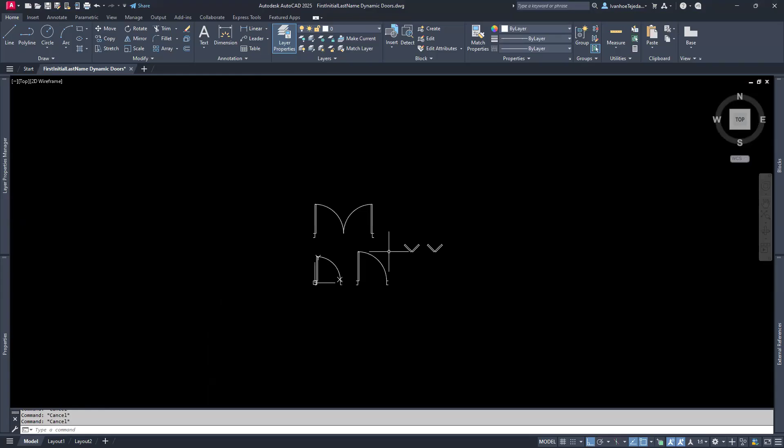First, the question about zooming in and out. I talked about it last week, how you can use the wheel mouse, and the question came up about being on a Mac or if the mouse is too sensitive and just jumps in or out. It can be problematic. So here's my solution to that.

Number one, if you're okay with the trackpad, sometimes you can pinch. I've tried pinching before, and here I am pinching on my trackpad, but it just doesn't feel natural to me. I'm not used to that, but that's an option. Pinch in, pinch out, just like you do with photos, and it may work. You can try that out.

That's number one. Number two, over here on the side of the screen, you're going to see this window. This is the navigation window, I think it's what it's called. I don't think I can move it away either. And be careful, don't close it, because if you do, I have to figure out how to bring it back. But there's this wheel right here.

Let me hover over it again and click on this dropdown for a second. This is the navigation wheel. I always like to have it on full navigation, but you can reduce it. You can go with the mini, as soon as I show you how to do this. So I'm going to leave full navigation wheel on for now.

And then I'm going to click on the navigation wheel like this. When I click on it, you'll see that I have a few options. Now be really, really careful here. If you click on this orbit, it is going to give you some problems. The only thing I would use in this case would be the zoom and the pan.

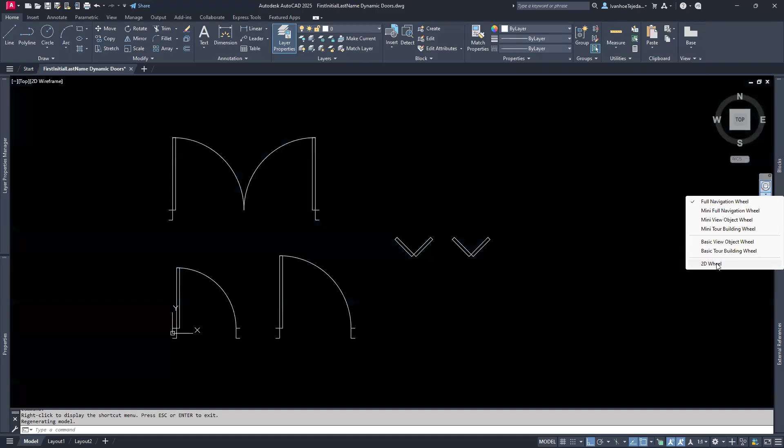Let me take back what I said a moment ago. Don't go with the full one. Can I go with a 2D wheel? Let's see if I change it. I hardly use this. There we go. Okay, so here we go.

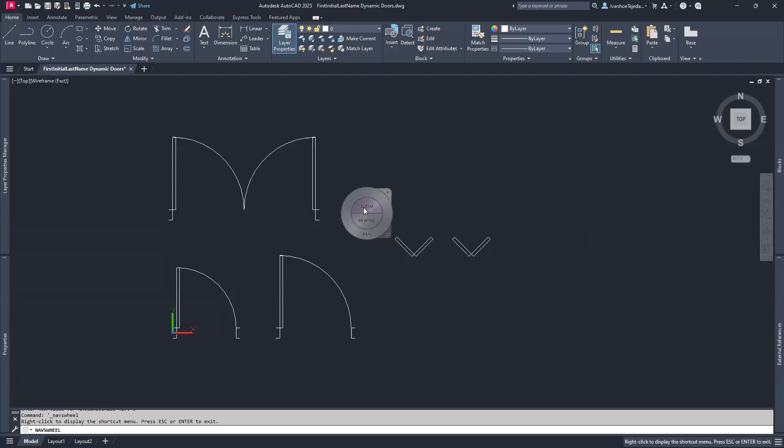The 2D wheel looks like it'll work because I can zoom and I can pan, and there's a rewind here. So all I have to do is move the wheel more or less to the center of my screen, give it a click, but don't take your finger off the mouse. Click and then drag up or drag down, and that will zoom you in and out. Then release the mouse, and you're back to zoom.

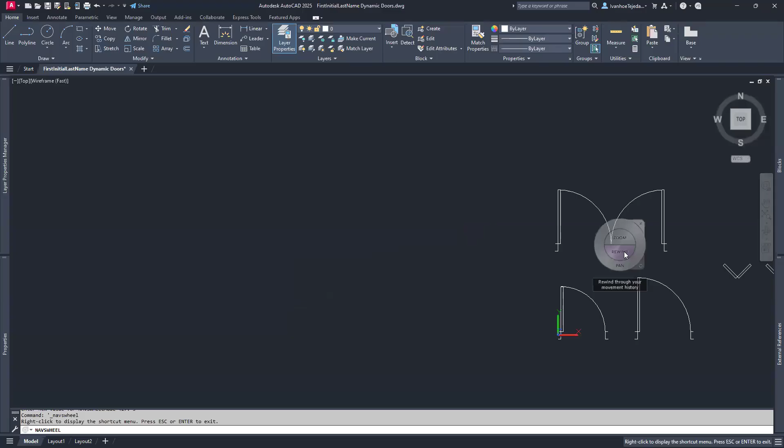If you want, you can click and drag to pan, and you can pan the drawing. Let's say I accidentally pan it too far. I can use this rewind, hold it down, and it will rewind and take me back a couple of steps, as far back as I want to go. So let's say I want to stop here, I release it. So zoom, pan, and rewind.

This will be helpful, so try that. Then I'm going to click on the X up here, and that's going to close the wheel. It's always going to be on the side over here. So yes, make sure you're using the 2D wheel. All right.

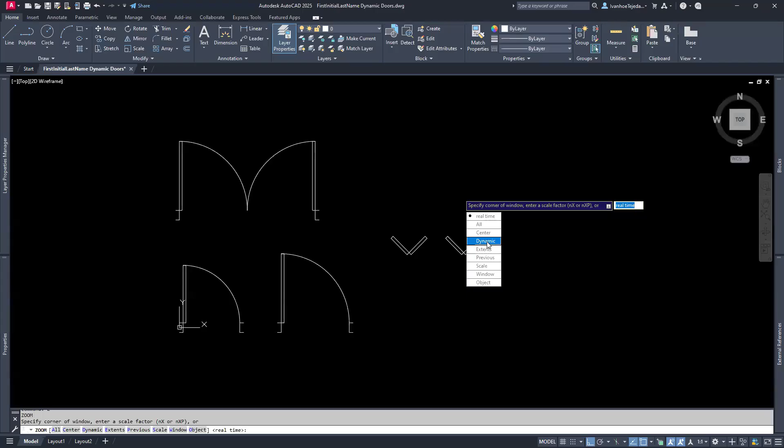Now for the third option, I'm going old school on you, real old school. Before we had a wheel mouse, and yes, I remember those days when it was just left and right click, there's a zoom feature called Zoom Dynamic. Nobody uses it anymore, but boy, we could not live without it years ago. So I'll type Z, enter, and under my options you can see in the command line it says all, center, dynamic, and so on. If I use my down arrow, I can see all the options here too. I want to go with zoom dynamic, so I'll click on it. When I do that, you'll notice my window changed, and now I have a floating window here.

This is really cool because I can click and drag. When I click and drag, I can zoom in a bit like this, and I'm also panning at the same time, so it lets me do that. Then I release the mouse, click, and right click, and it will zoom me in right there. So zoom dynamic works.

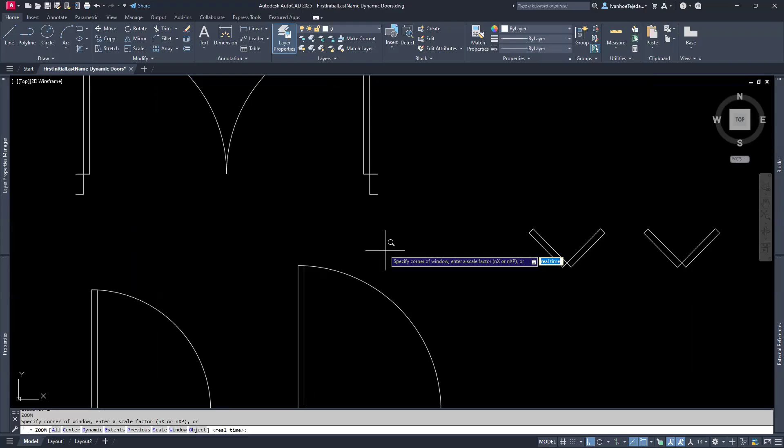Let's see, I'll try again. Z enter, D enter, and then I can try to zoom out. I don't know if it's letting me zoom out any further. That's the problem here. So I'm panning, I right click. Okay, that might work. I can also type Z enter, E enter again just to zoom extents.

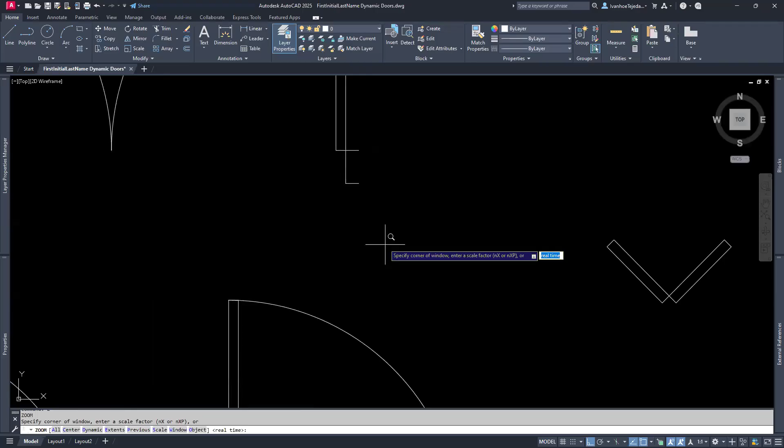I can type Z enter. Is there another option? Yes, let's see, can I do this? I don't want to do scale, I'm going to try 2x. So zoom out, let's see if it takes me twice the distance out. No, twice the distance in. So if I type Z, enter, and then 0.5x, enter, that'll zoom me out. Let me try that one more time. Z, enter, and then 0.5x, enter. Yeah, that'll zoom me out.

But that's a lot of keyboard work, and if you're comfortable using the keyboard, that's the way to do it. So those are different ways to zoom within AutoCAD. I'm trying to see if there are other options. One more, real quick, within this.

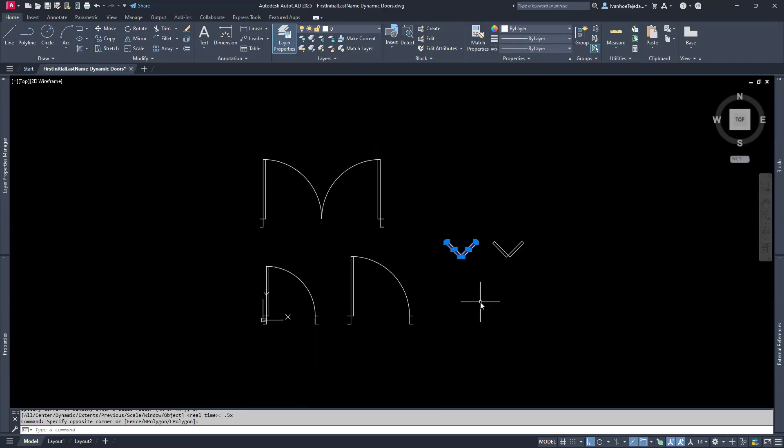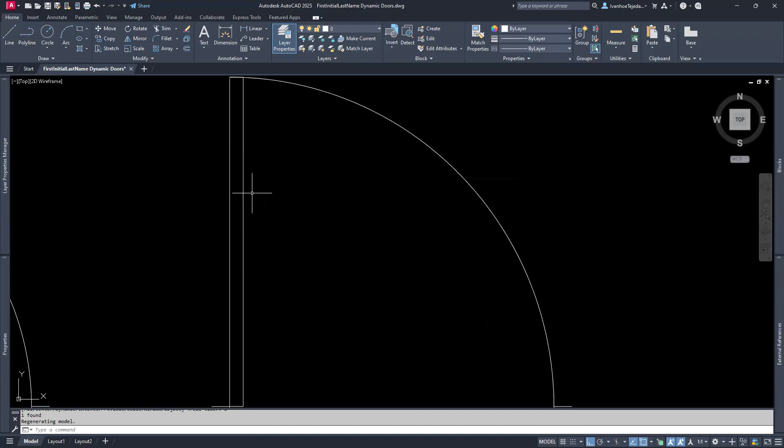If I just click on this one object right here, let's say I window all of this, okay, and all those objects are currently selected with the grips on. If I type Z, enter, and then O for object, enter, it'll zoom right to that set of objects. Let me zoom out again and do this one more time. I'm going to click on this arc, that's it. Then I type Z, enter, and O, enter, and it'll zoom me right into the arc. Obviously the other lines and objects are also there, and they're part of that zoom.

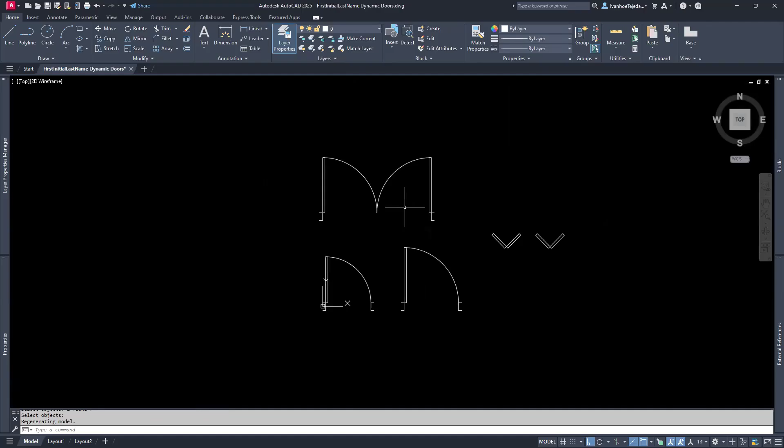I don't have to pick the object first. I can always go Z, enter, and then O, enter, and then select the object. I'll pick this one here, and then enter, and it zooms me right into that object, and this is a polyline. So those are other zoom options available to you. And then, of course, the double click on the wheel mouse, which doesn't always work for me, but there it is, and that's a zoom extents.